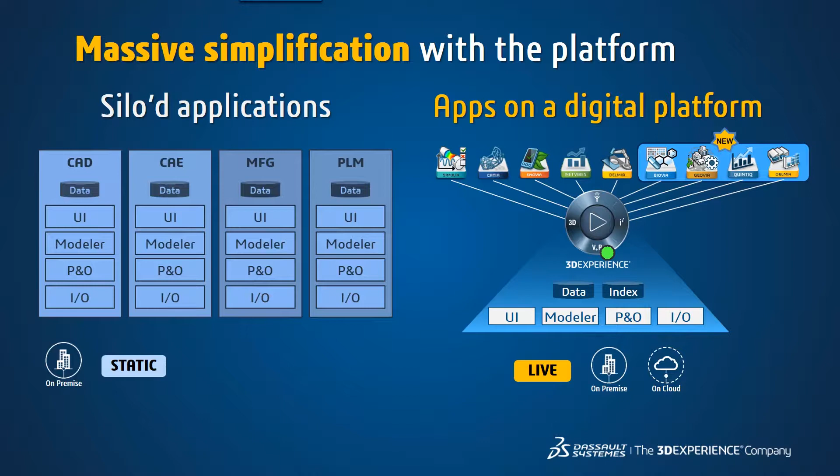So just a quick example of this. If we had a regular file-based CAD situation where we have our designer working on something, and they need to process this, we're going to do some CAE. So our designer goes ahead and does their design, and saves their data into the PLM. Then they have to notify the pre-processing engineer, something like Hypermesh, that, okay, you can work on that now. And then once they do, the analysis kicks off. So it's just checking in and out and going around. It's potentially a nightmare. I'm probably not telling you anything you don't already know.

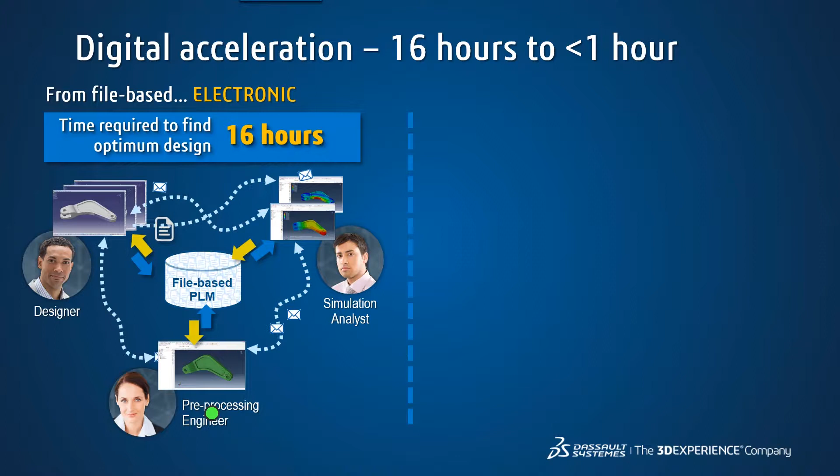So what we say is when we have this single repository on the platform, everybody can see at one time, and we can take something similar to this design change from an electronic standpoint to what we say is a digital standpoint. And because everybody has access directly into the platform, they have the ability and capability to work on the data on an as-needed basis.

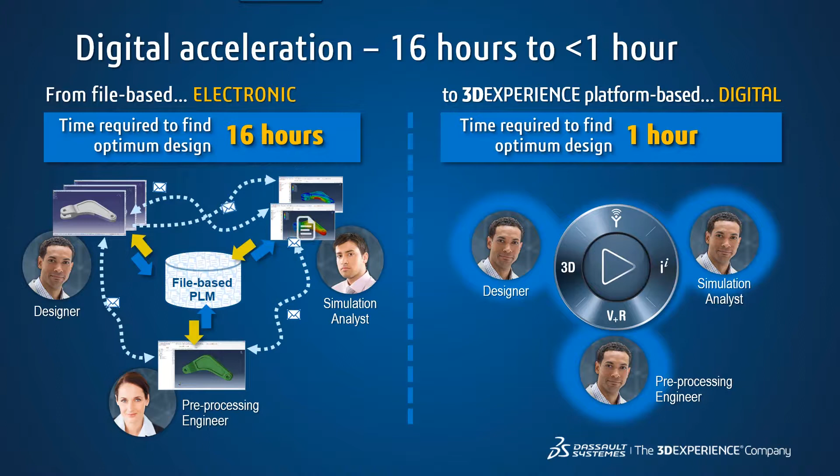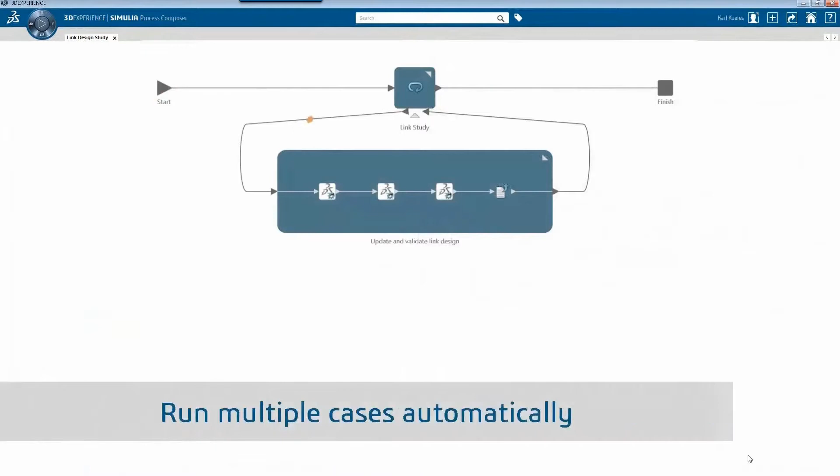What do we mean by that? Because we have the same modeler going on, I can expose parameters as a designer inside of my design so that my analyst can then have the ability to go through and actually do multiple use case testing on a component. So we know that we can specify maybe some sort of a pocket depth or a wall thickness, and the analyst has the ability to let the software go through and study each one of those variants.

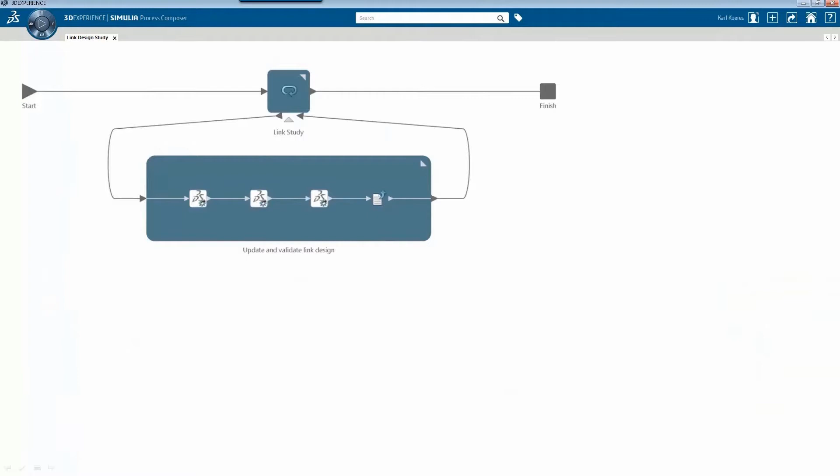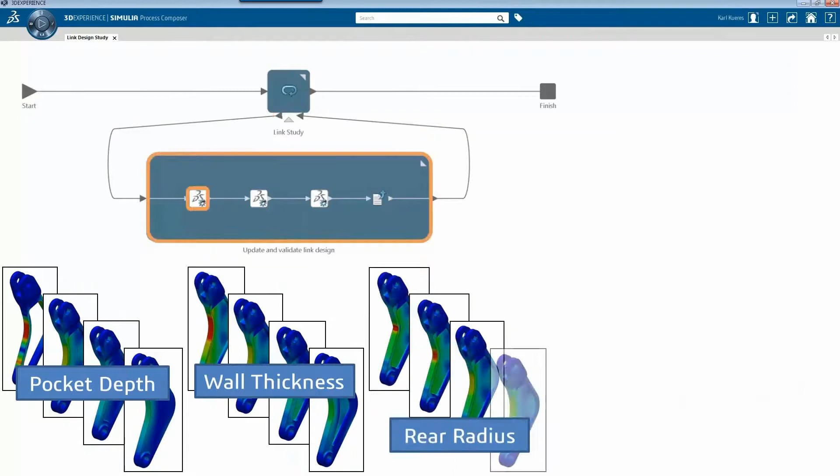So now I don't have to wait for the designer to go ahead and make the modification. We're going to let the platform do that for us. So we can do a pocket depth analysis, change a wall thickness, change a radius, and see what we actually have from our design and what can be our best design.

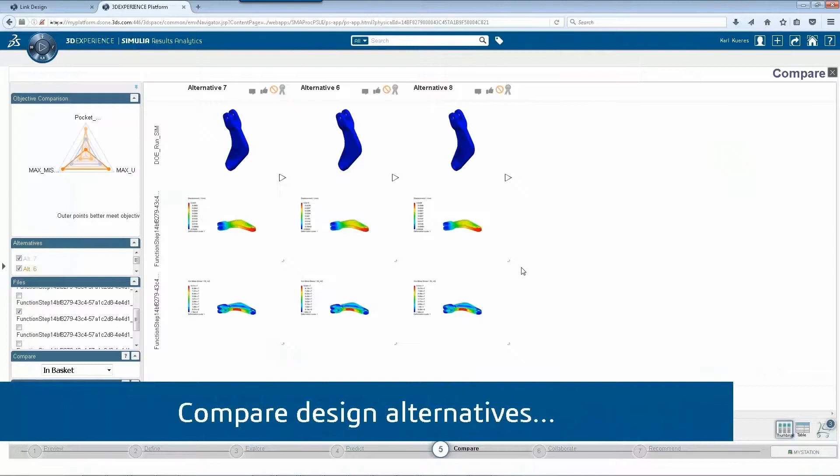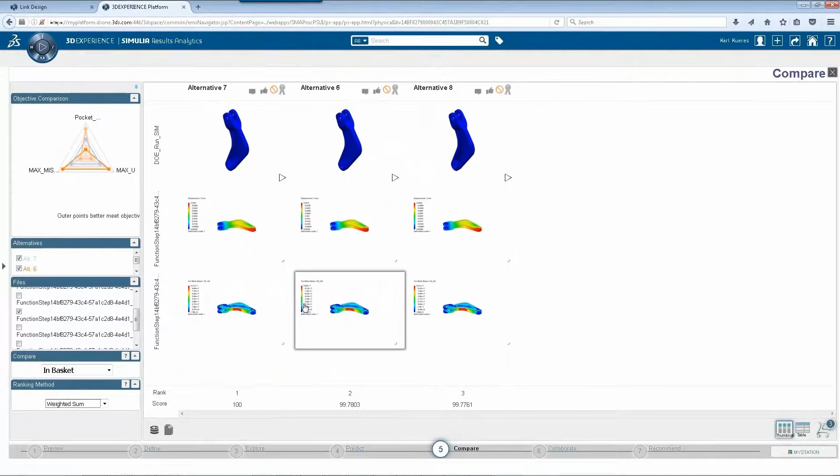As a part of that, we now have the ability to compare between each one of those. So no longer am I stuck with: I do a design, I see an analysis, is it okay? Oh, I do another design. We do this cycle throughout the platform.

So on each one of these, we come back and we can have an output against each one. And again, depending on what our target goal was—were we going for a stiffness parameter, a material removal parameter, or a lightening parameter, something of that nature—which one of those actually fits to get into what we wanted to see from our product?

One in particular, Simpoe, this is a plastic injection simulation software that is now part of the Simulia brand and part of, say, our mold tooling workbench or application set. We can actually do a designer-level plastic injection simulation for that. But it's not third party—it's on the same data modeler, within the same interface of the platform.

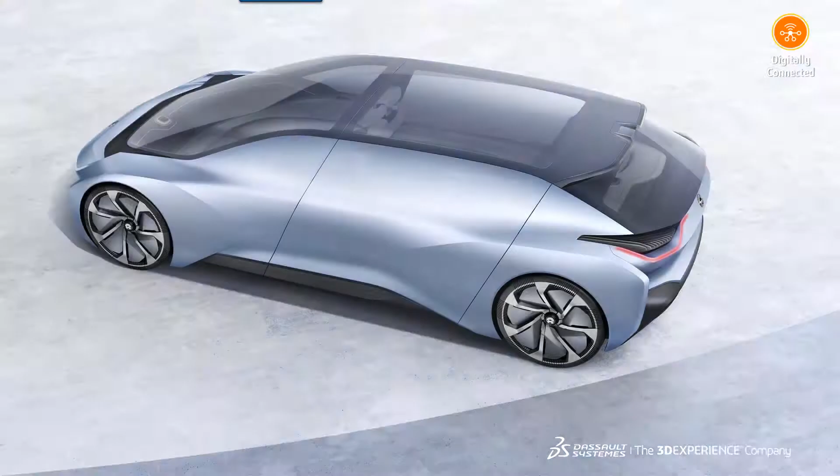One quick example: there was a startup in China with subsidiaries in US, Germany, and UK, and they were using Teamcenter and CATIA V5. For them to do a full body DMU review, it was taking about 3 hours to bring up that data with CATIA V5 and Teamcenter. So what we did is we went in with the platform, and they could do that exact same thing in roughly 15 minutes.

How do we do this? Well, it's that concept of being on the platform and having things like parallel loading and partial loading. Today, who has Netflix or Amazon Prime Video? When you want to start one of those services, do you have to wait 2 hours for the movie to download? No, the movie streams to you, and you get the data as you start using it. Same type of concept here - you're getting the data on demand.

Now that we have all this data, we're data driven. We need some apps, or some help, to actually go through and start getting the information out of this. So we need to start pulling from all these other areas. The platform has apps that allow us to get that data from these different areas and bring them into your own personal dashboards that you can then reorient and set however you need to be looking at that data, as opposed to it being scattered all over the place.

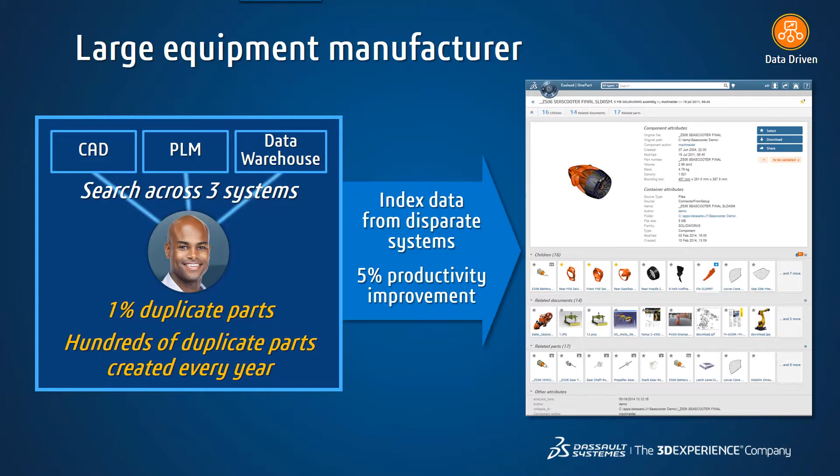who created it or not, make or buy, the company, but also start getting into information where we can actually do a 3D comparison of the geometry and go as far as take that and, with hooks into something like an ERP, ask: what if we get this one component from one supplier and get a better deal? We can make that be the master component, and everybody should use that component to get a better deal.

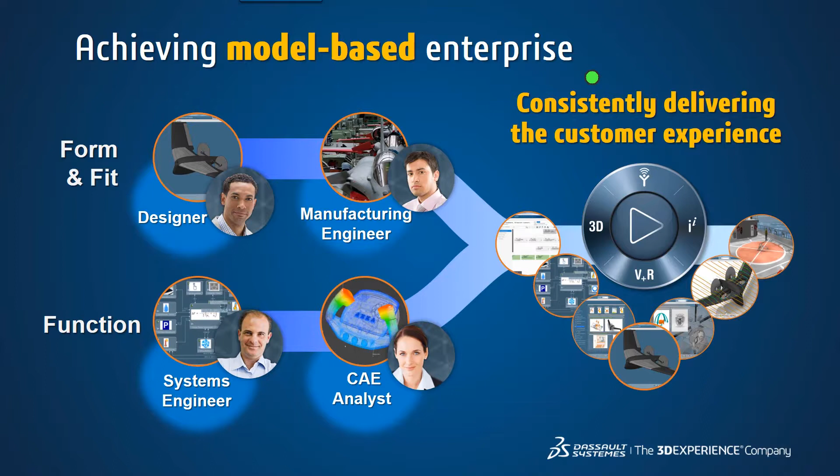In the past, CAE and systems analysts were kind of left out until the end. So now what we're saying is we have fit, form, and function between design and engineering flow into analysis as parallel tracks in the design platform. And as those parallel tracks go, because we're all dealing with the same platform and everybody has access to the designs at any time, as long as they have access to it, they can actually work together more cohesively that way.

Something as simple as, in the past, if you needed to make some sort of a change - something as simple as changing 1 millimeter - what would that actually do if we weren't running those parallel tracks and able to talk back and forth between them?

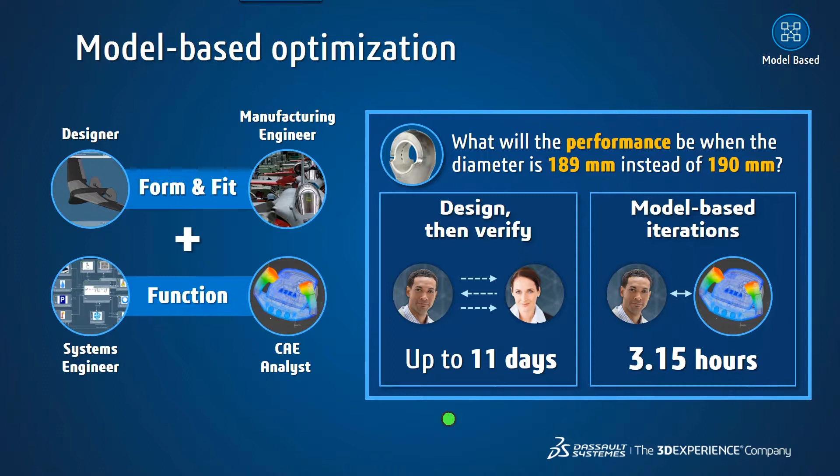So some of these numbers are use cases that were done with other companies. For a reason I can't use their names, but it's just some of the things that we've been able to go through and see from other companies.

One thing in particular you may start seeing more of is what we call the digital twin. The idea behind this is we're probably never going to get away with having a physical prototype of something. For a company like this that builds big engines, pretty much the size of this room, they're not going to prototype something of that nature. So the concept of having a digital twin, being able to do simulation and testing inside of the platform, and then marry that with what's in the real world, is a big deal.

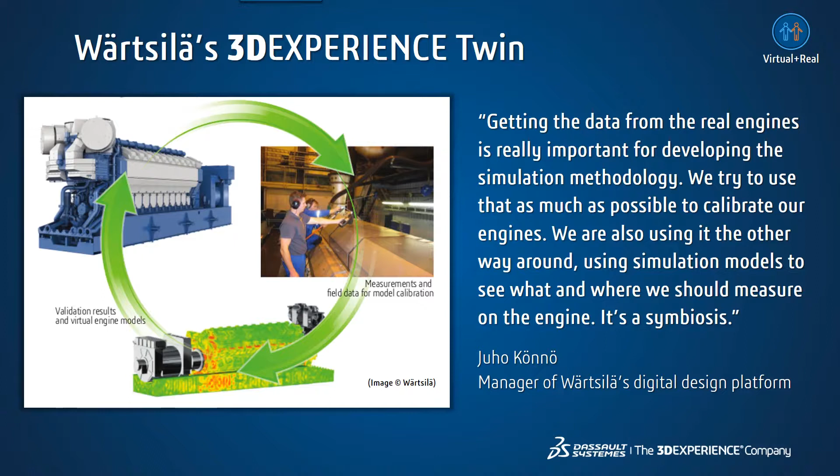To start, I'm on my platform, logged in through a simple web browser—in this case Firefox. This is my dashboard that's presented to me. A company could push out a dashboard to their people, but I can also make my own, so these are the things that are important to me.

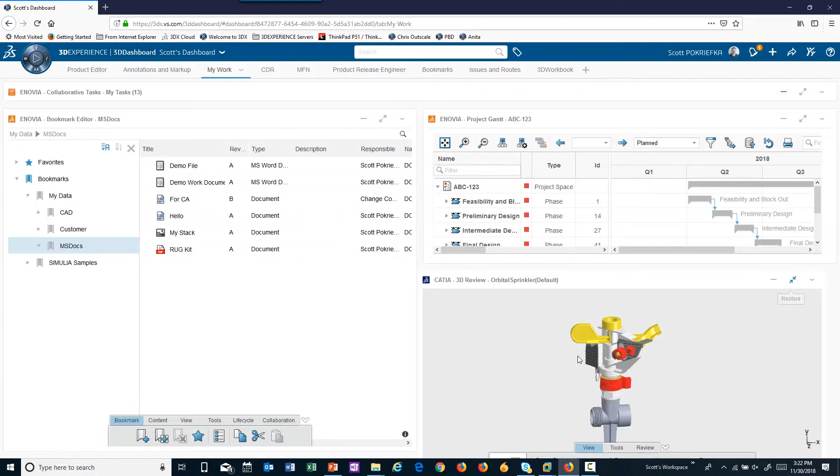I also have a 3D viewer here, so I can see what I have inside my 3D data. This viewer is a plugin-less viewer, meaning I could have this viewer on any web-enabled device—my tablet, my smartphone. I've even done a demonstration on my refrigerator, because it has a screen I could connect to the internet on. Why did I do that? Because I could.

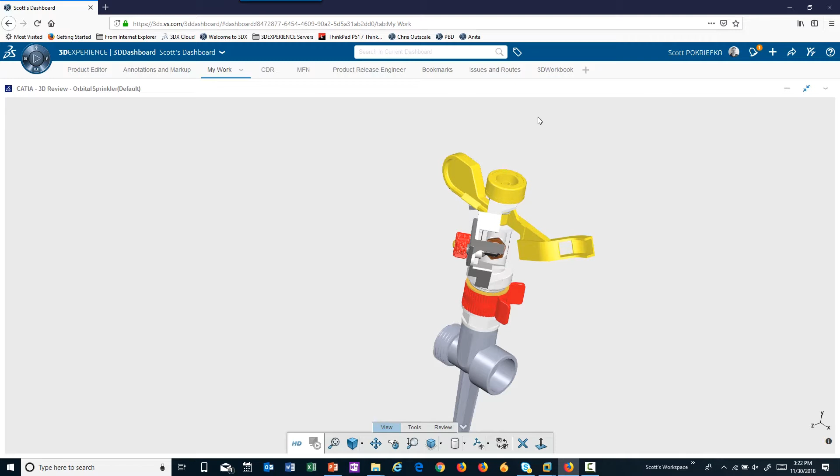Within the platform, we also have a way to distribute tasks amongst people. Here are the different tasks I currently have going on—right now I have a couple tasks in a ready state. This is a way we can give information back and forth to people as to what the next thing is they have to do, so instead of waiting to be told, it's part of my workflow.

These tasks can be linked to something like Outlook, so if somebody lives inside Outlook, they would have the capability to see them there as well. But it's a bit of a paradigm shift—hey, maybe my new workflow is to start in this web browser every day.

Coming back, these are my dashboards set up for me, and I actually have collaborative tasks in a couple different panes in case I really want to be paying attention. We also have the ability to work with change actions. If there's data that has to go through for change and has to be followed and flowed through, I have all the changes I'm a part of right at my fingertips here, from the web browser.

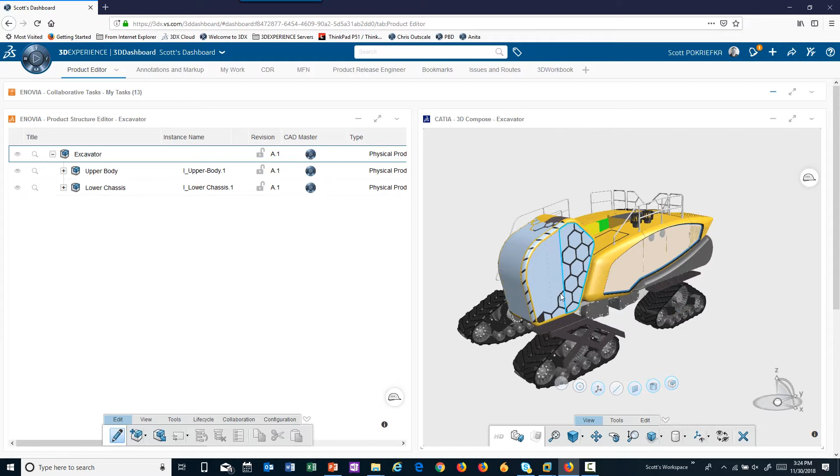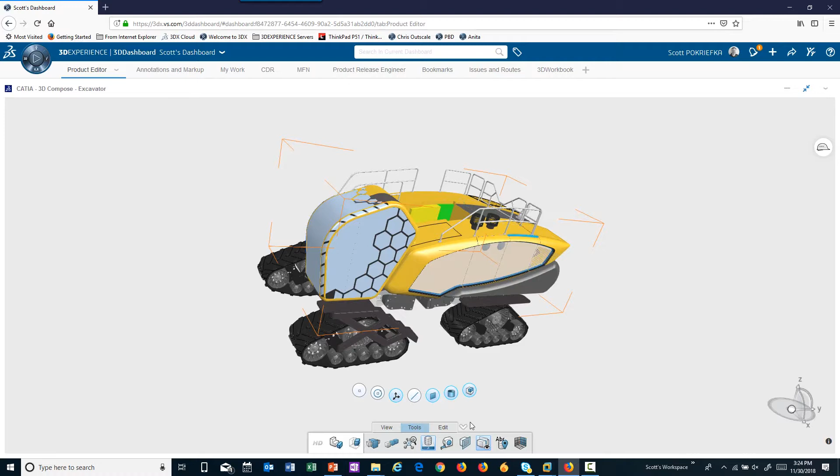Some of the viewing capability we have—again using our plugin-less browsers—this is some 3DEXPERIENCE CATIA data. We can expand this out so the engineer or whoever can get a sense of what data they have. We also have tools from these viewers to do sectioning and measuring, all without having the native CAD application.

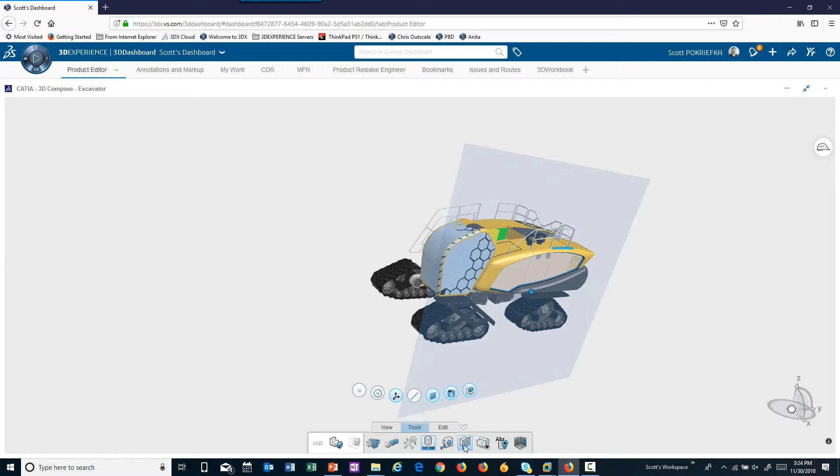I think because I'm recording at the same time, it's locking up on me a little bit. Come on, turn off. Thank you.

One of the things we can do from our web browser is search for data. So the idea behind the platform, whether we're in the web browser or in the rich client of 3DEXPERIENCE, it's all going to look the same.

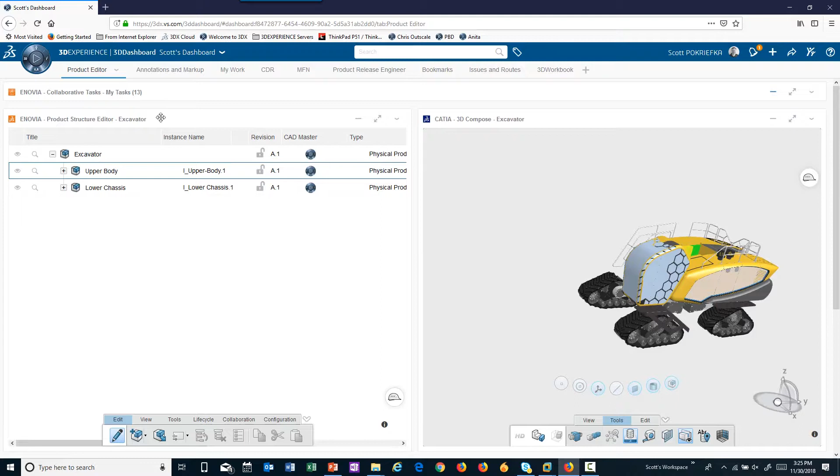You've seen it in the presentation, this compass that was on screen. This is the 3DEXPERIENCE compass, and this is how I interact with the platform. These are all the apps I have access to per the licenses I've been granted.

As I come through, I have my 3D type apps, pertaining mainly to 3DEXPERIENCE CATIA. But you also see I have a CATIA V5 one here, and a SolidWorks one here. Basically, the idea is I want to be able to potentially use this data with CATIA V5 or with SolidWorks, or in this case, 3DEXPERIENCE.

I can also set up some favorite apps, things that I use quite a bit, so I just have a list of them I can easily get to at any given time.

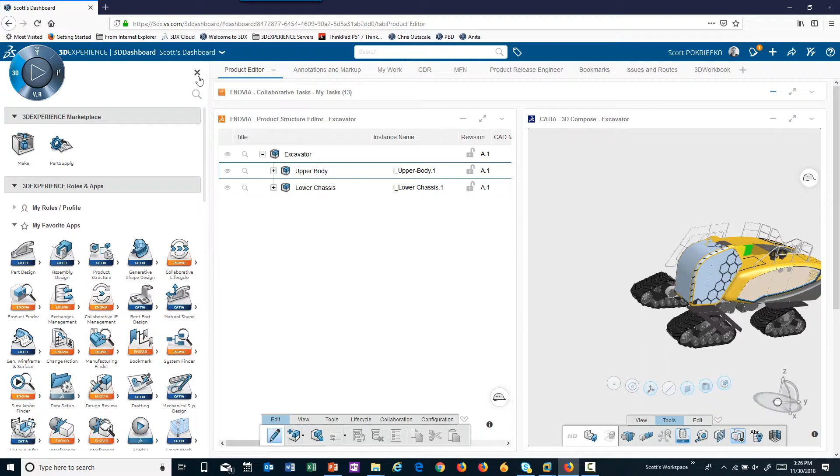If I wanted to find some data, I just have a search bar across the top, and I'm going to do a partial text search. This will search the platform for anything that had the word 'boom' in it. What's really cool, in my opinion, is we get a highlight of where it found that word.

Of course I picked one that didn't have it in it, but more importantly, our search technology will actually crawl inside of documents. So if you have a Word document, an Excel document, or a PDF document, when we index for search, it will go inside that document, and your search would look inside those documents as well.

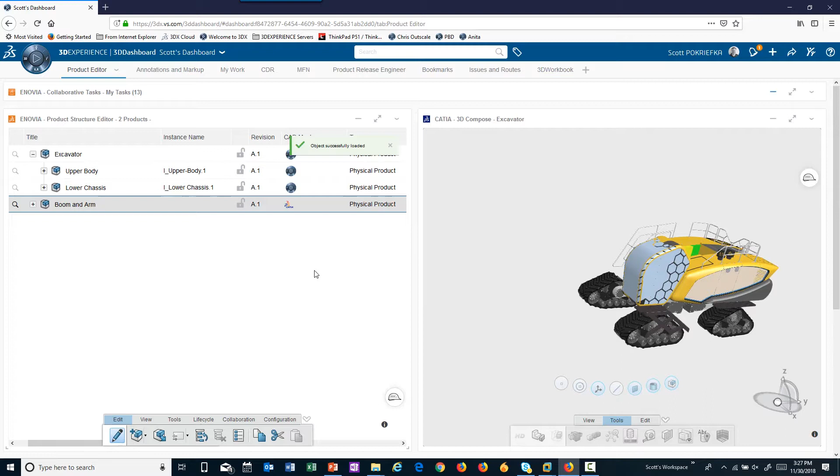So here I've got my boom and arm. We're going to drag that into our tree here. And what I want you to take note of is that, without a CAD license, I've started to build basically a hybrid structure.

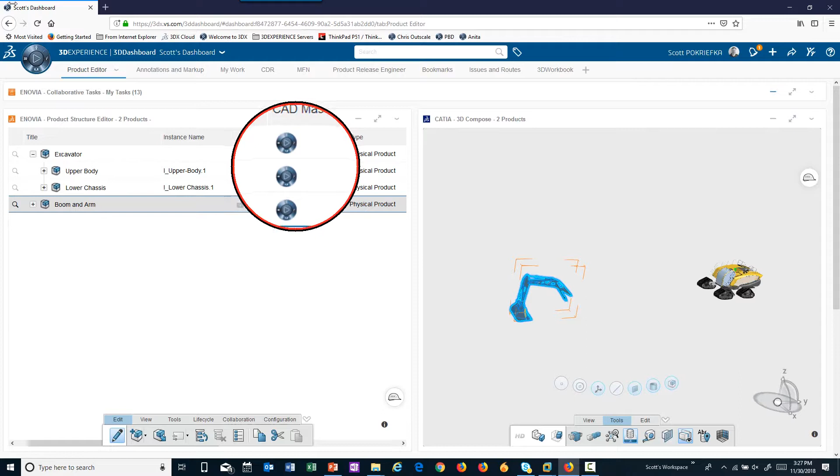This last structure I brought in is a CATIA V5 object, and the other objects are 3DEXPERIENCE CATIA objects. That's denoted by that little CATIA logo versus the compass.

So over here inside of my viewer, now I have both of those objects inside this viewer, one of them happens to be 3DEXPERIENCE CATIA data, and the other one's CATIA V5 data. But I can start doing things with this now.

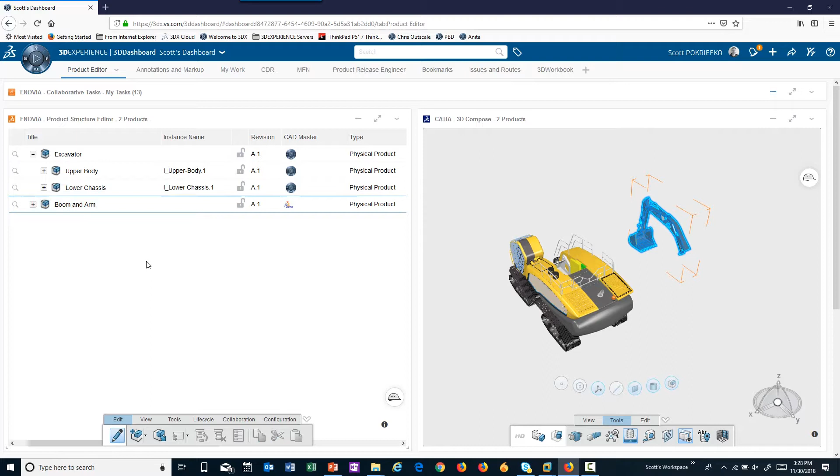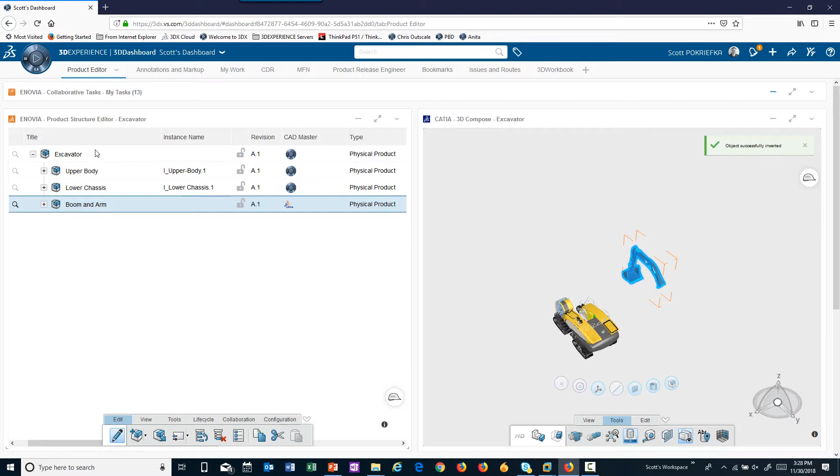I can actually build and create a product, or basically a new assembly on the fly. So I can come in and just with a quick drag and drop, I can drag the component and make it part of that 3DEXPERIENCE CATIA subassembly or assembly. And now I basically have a true hybrid assembly.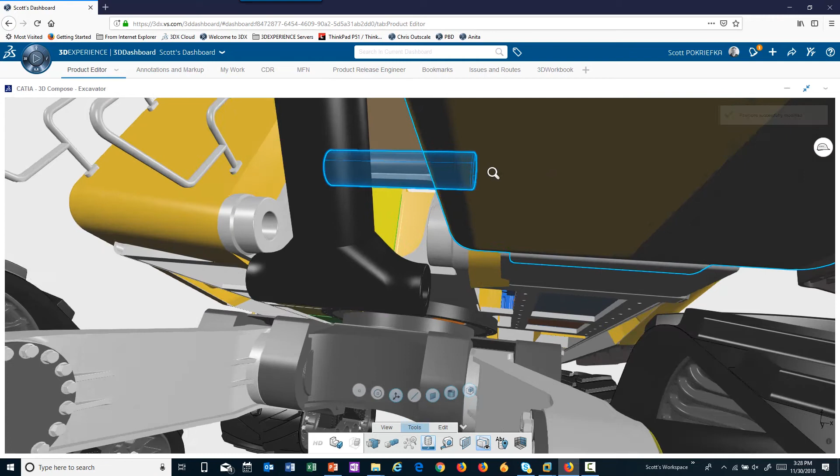Let's go ahead and take this and marry it to the 3DEXPERIENCE data. So now inside of this viewer we have the capability. Now I got it close, but the tool recognizes we're not actually going to make an actual mate between them. Come on, come back.

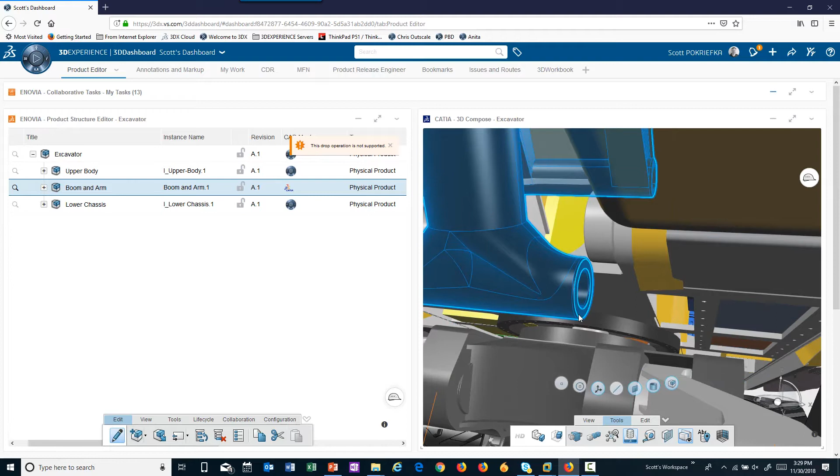But I do have the ability to recognize cylinders and edges and things of that nature. So I can go through, and if we just say we're going to grab that, it snaps it on.

So the idea here is I can quickly start building out an assembly of how I want to work with it, quickly, before actually generating any type of real constraint or mate between there. It's allowing me to work in this hybrid type world, in this case, between the CATIA V5 and the 3DEXPERIENCE CATIA data.

If I had a SolidWorks model, I could do the exact same thing. And coming very shortly, we'll be able to do the same thing with NX and Creo as well.

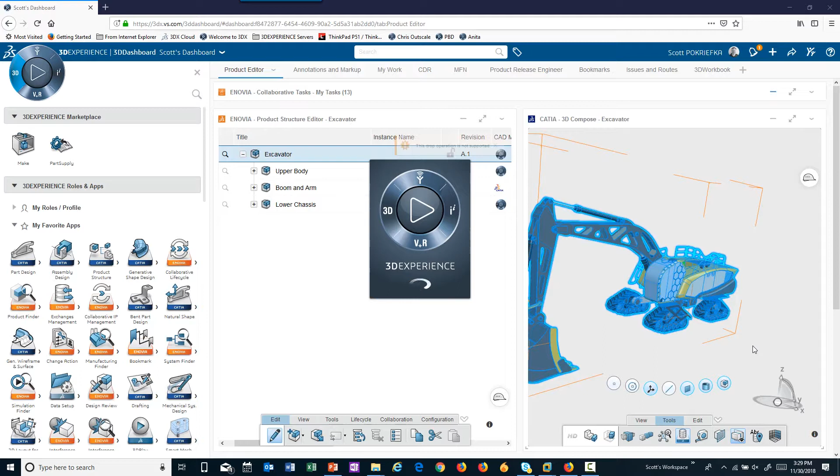So what I was trying to stall for was, while this assembly was here, I actually said, hey, I wanted to use the assembly design app of the rich client. So at this point, I'm launching the rich client of 3DEXPERIENCE CATIA to have this assembly in here. And apparently I didn't stall long enough, so let's give this a second to finish opening.

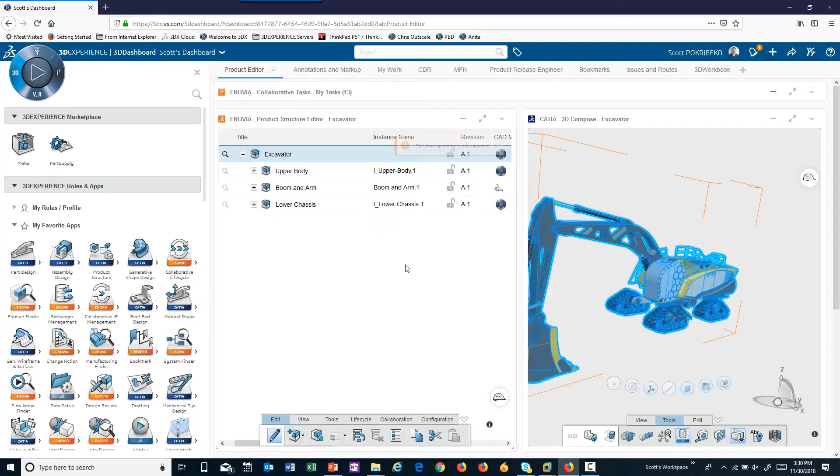Yeah, I know I'm talking a mile a minute, but are there any questions so far while this is finishing opening? About this 3D viewer thing, do you think we're able to see the tree structure of that?

Yeah, so this right here is the same tree structure as in CATIA. These are just the subassemblies. If I go ahead and expand these out, you can expand out to the lowest level, the part level. Parameters I can't get to, no. So I'm just going to see the object level.

Okay, so to get to the parameters or the actual geometry, here it is in the Rich client. Let me see which one was that. What did I pick on? The upper body counterweight. So if I did the same thing, upper body counterweight maintenance.

Now here, because I'm in the Rich client application, I can get to the parameters. The idea behind the web viewer is you're not changing your native CAD, but we're granting you access to do a preliminary study with it and to view that data.

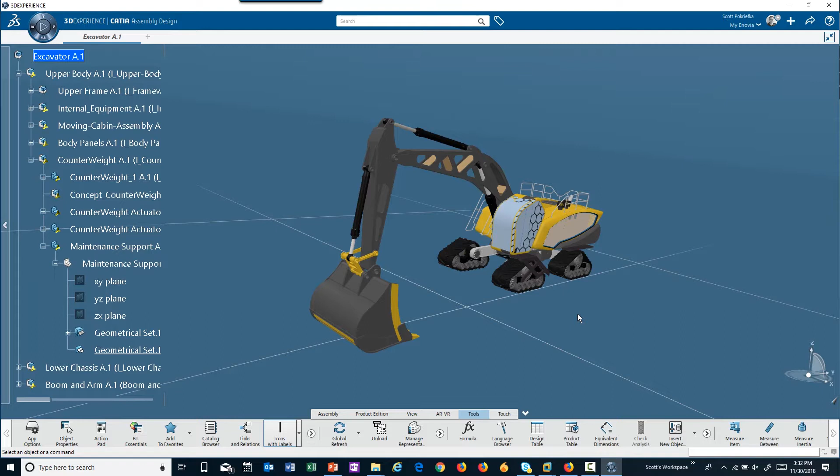So in the same instance here, the whole arm is all the V5 data. If a modification had to be made, I do not make it inside of 3DEXPERIENCE CATIA. I go back to CATIA V5. That means that's CGR or something?

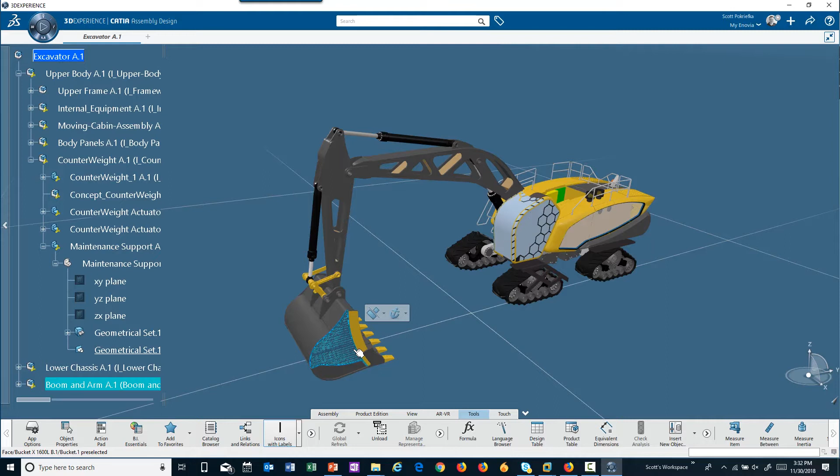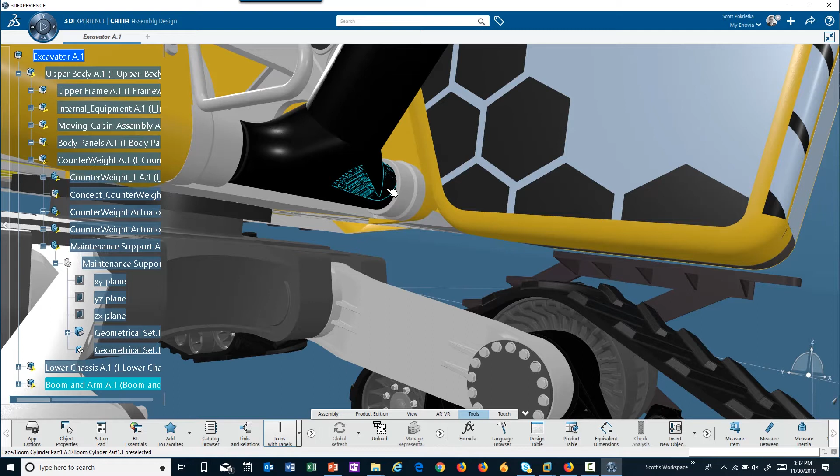There is a CGR component to it, but I do have the ability to actually build a constraint in the Rich client of 3DEXPERIENCE. Before I was just kind of snapping these components together. Now that I'm in the Rich client, it does have a BREP mapping of it, and I could actually build a constraint here, but I use CATIA V5 as the master to drive that.

Does that mean when data size gets bigger, it's more difficult to pull up the data or view it? Well, depending.

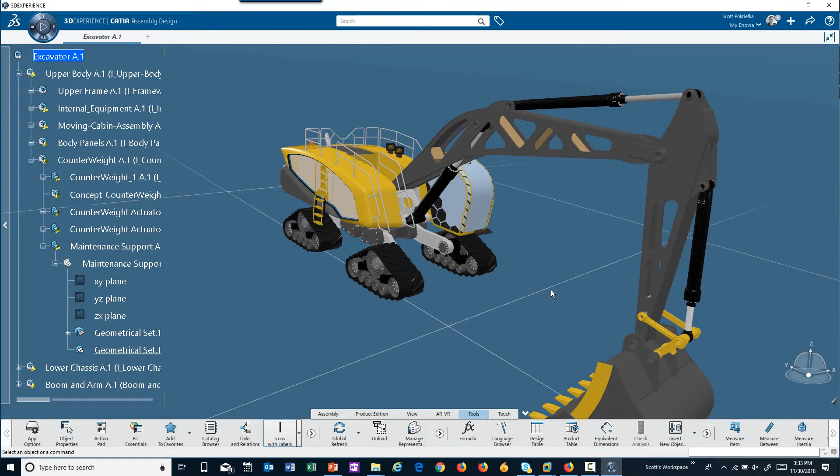So our viewing technology is actually... and so did you have him ask that question? Because you wanted to see the Star Destroyer, didn't you?

So our viewing technology is actually pretty strong. So what I'm going to pull up here, the question always becomes: what constitutes a large assembly? So this assembly is—let me back up.

What I mean is, is it count of objects, count of triangles, model size—what is a large assembly? So this assembly that I'm going to pull up is close to 20,000 objects. The first thing you're going to see, it's not going to look great, because the first part of the technology, what I call the navigation layer...

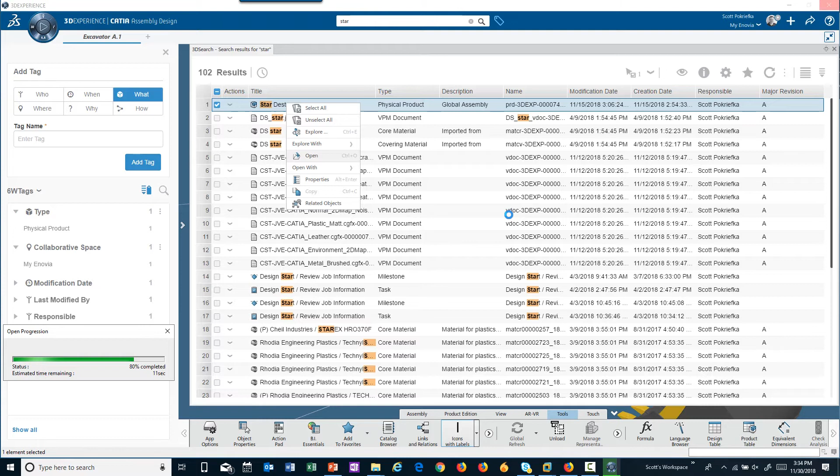So yes, I've done a search and pulled it through, and what I'm afraid of is, because I am recording, this is usually a little bit faster. It's only going to show me objects that are of a certain size, and then I can start breaking that tree down.

More to the point is, even here at the level of this assembly, if I just get out of this for a second, we can start using different tools for doing volumetric searching. So if I just say do a search for a bucket, and I want the cylinder—like it's a CATPart or CATProduct or something—that is actually pulling up.

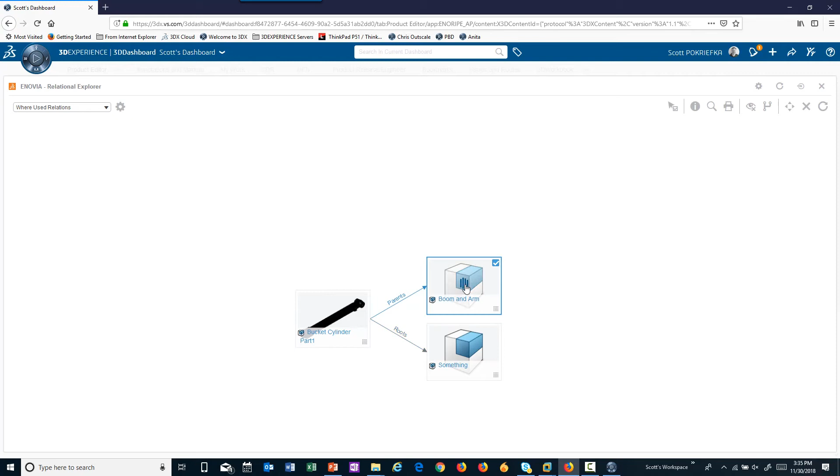So I can come in here and say, what are the related objects for this? And because it's on the platform, it knows where the geometry is living from.

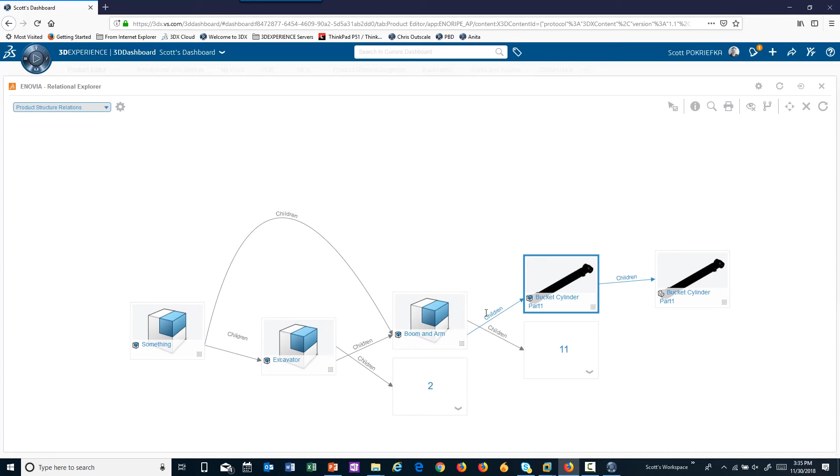So from this example, let's go to product—let me go to the actual product structure relationship instead. So I can see that I have the actual cylinder and then the actual geometry that makes it up. It's a child of the boom and arm and the excavator, and apparently I had another assembly there called something.

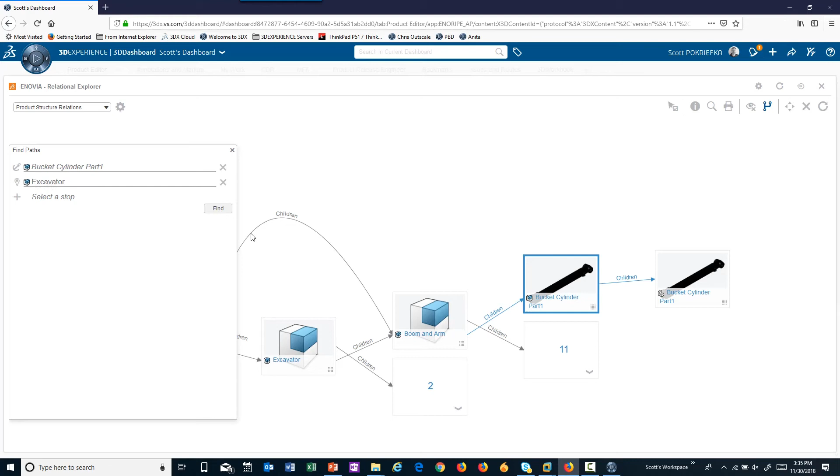So then we can actually come through and say, if I go from this to the excavator, what makes that up? So I have these components.

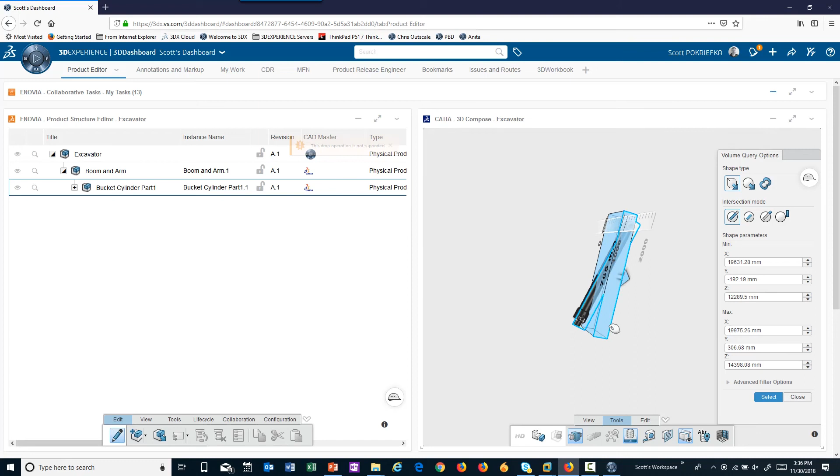And then from inside of here, we can say, well, let's do a volume query of this. So based on the geometry that's here, I'm just going to make this box be a little bit bigger. And so what I'm saying is, anything that's touching this box, go select that geometry. Okay, and because I moved the box way out of position...

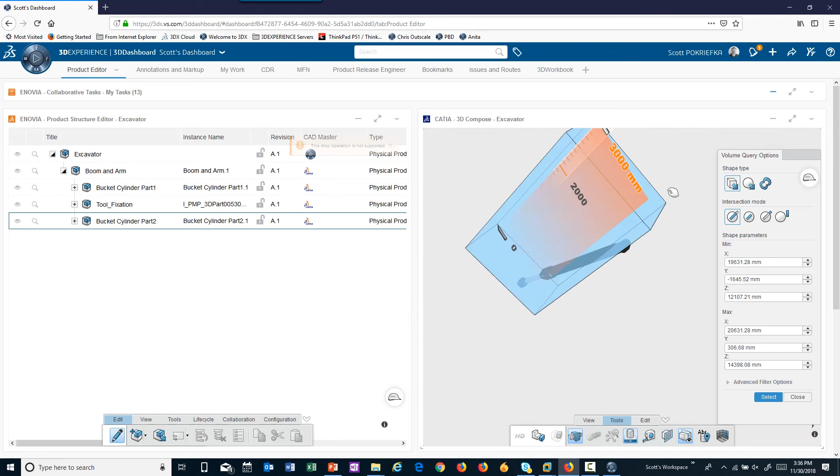Let's see what else we can gather from this. Come on. So the idea is, I don't have to always open up all the geometry, because I have these tools that are going to go out and find other geometry without me having to open it.

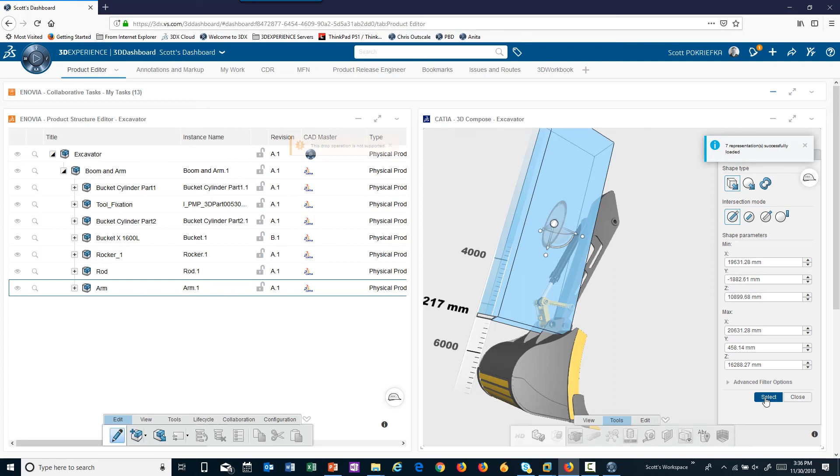And then at this level, if I select that and close it, I can actually say, well, let's take that to—in this case, I know this is CATIA V5 data. I can say, let's just take that CATIA V5.

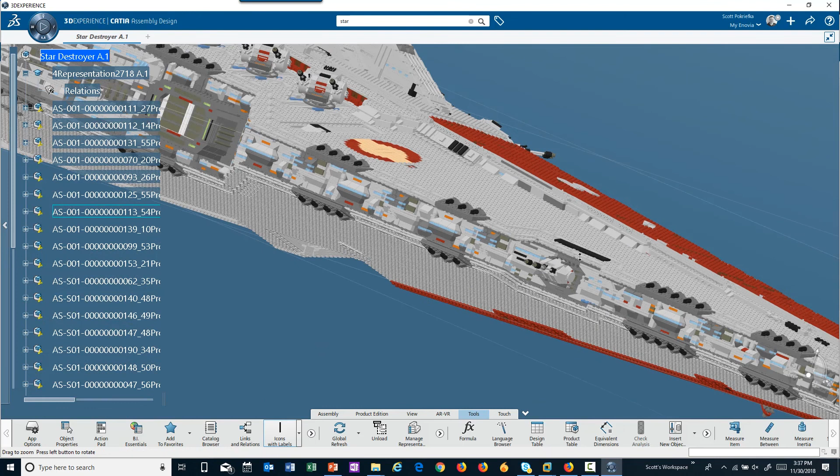Okay, so if I go back to 3DEXPERIENCE CATIA, this is the assembly I was talking about—the 20,000 objects that live inside of here. From a size standpoint, from stem to stern, this is a little over 7 feet. So while it may not be huge, there's a large part count in here too.